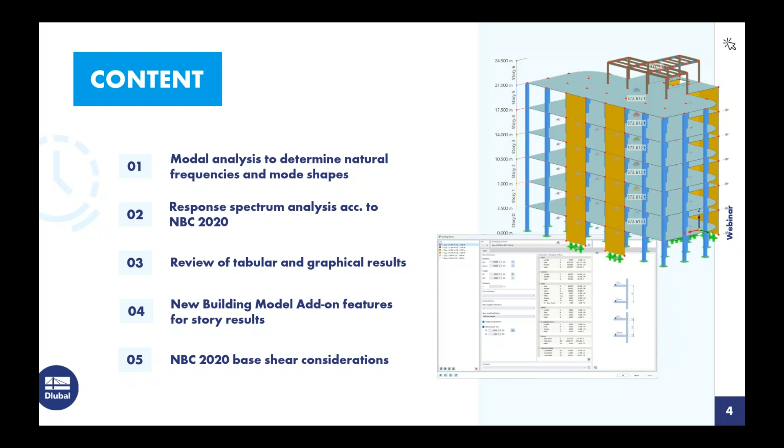So before we begin, I want to discuss the NBC 2020 earthquake methods of analysis that are given in Article 4.1.8.7. So we do have the equivalent static force procedure that is provided in 4.1.8.11, and this is certainly a simplified approach for seismic design. Now, this can be applied for buildings that are of seismic category SC1 or SC2, given in Table 4.1.8.5-B.

It also can be applied to regular structures with a height less than 60 meters and a fundamental lateral period less than 2 seconds. We can also apply this simplified approach for irregular structures, and we would refer to Table 4.1.8.6 to see what categorizes a structure as irregular. But the height must be less than 20 meters, and that fundamental lateral period must be less than 0.5 seconds.

Then we have the dynamic analysis procedure in 4.1.8.12, and this includes the response spectrum method, the time history method, or the nonlinear dynamic analysis. And this should really be applied to all structures that do not satisfy the simplified requirements set forth in Article 4.1.8.7. For today, we'll move forward with the response spectrum method for our structure.

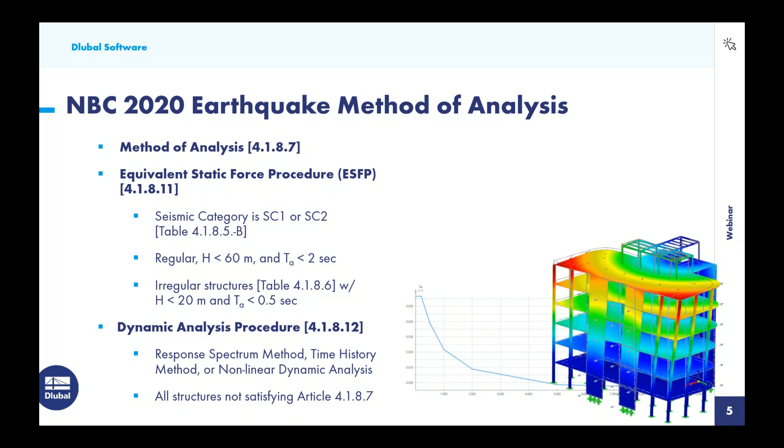So we'll begin in RFEM here, where I have already modeled our multi-level story structure. So we'll quickly go over a bit of the model input as shown over here in the RFEM 6 navigator on the left. So we can see our input materials, and a majority of the structure is defined here as a concrete material with a compressive strength of 40 MPa. But we also have a small steel structure up at the roof level here with a material of A992 steel.

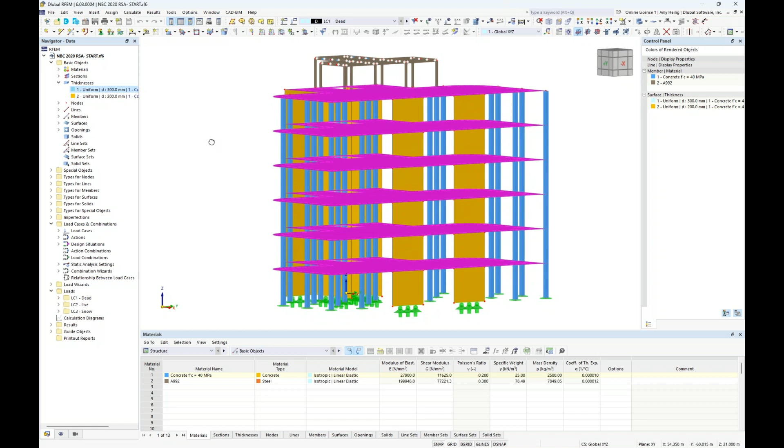As far as our cross sections, you'll notice that our concrete columns that are spanning between floors are just going to be square 350 millimeter by 350 millimeter concrete rectangular sections. And then as far as our steel members, we have several W shapes defined directly from the RFEM 6 CSA library. And finally, we have the thicknesses defined of our surfaces. So this would include our floor slabs here, which are defined with a 300 millimeter thickness. And then we have the thickness of all of our shear walls, which are going to be defined with a slightly smaller thickness of 200 millimeters.

So that's just a basic overview of the structure, but we would also like to take a quick look at the applied loading that, again, I've already added to this particular model. So within our dropdown, we have three simple load cases, all gravity loads. The first is going to be our dead load, and this is going to be a surface area load of 3.5 kilonewtons per meter squared applied at every level.

We also have a live load, with a modified magnitude here of 2 kilonewtons per meter squared, again applied at every floor level. And finally, we have just a general snow load at the top level here of 1.5 kilonewtons per meter squared. So now that we have reviewed the overall structure and the loading, we want to move forward now with our modal analysis.

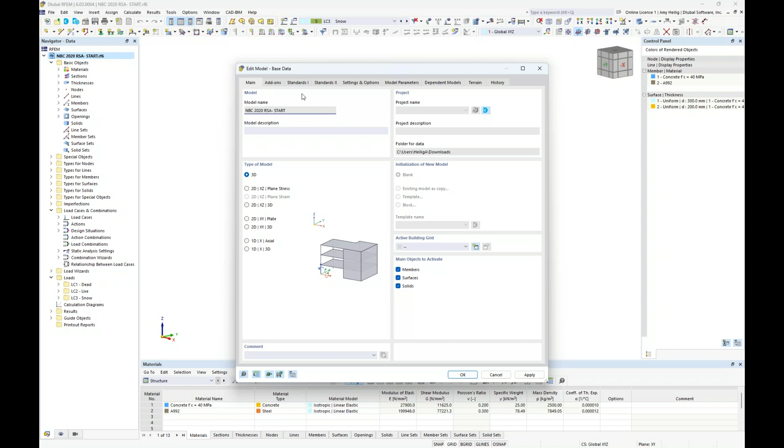So we want to right-click on the model name here in the Project Navigator to visit what's called the Base Data dialog box. And this dialog box would be presented to you when you first create a new model within RFEM. But on the second tab are all of our optional add-ons.

So to quickly explain the configuration of RFEM, the base program itself allows us to fully model the structure, including all of the materials and cross sections from the library. We can apply loads and run a basic static analysis. But the minute we want to move forward with design according to the various standards, we would activate one of these add-ons, for example, concrete design, steel design, timber design, and so on. And in particular, today, we want to activate our dynamic analysis add-ons, and we'll begin with the modal analysis.

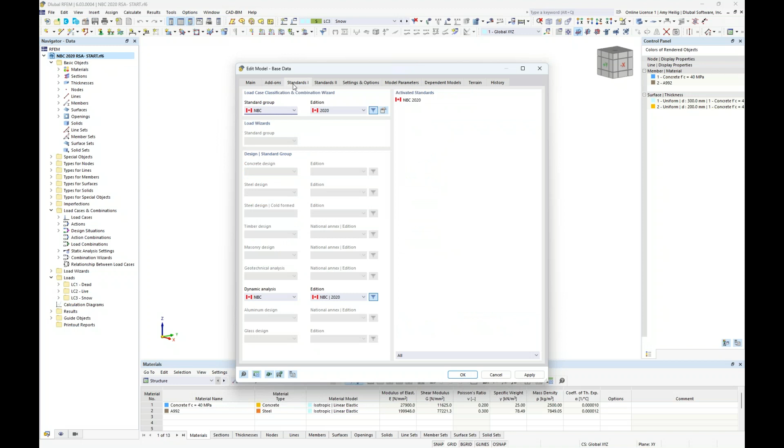So on the third tab, we will generate our load combinations automatically according to the NBC 2020, but we see all of the relevant international standards that are available in the base program as well. And because we have activated now that dynamic analysis add-on, we will go ahead and reference the NBC 2020 here.

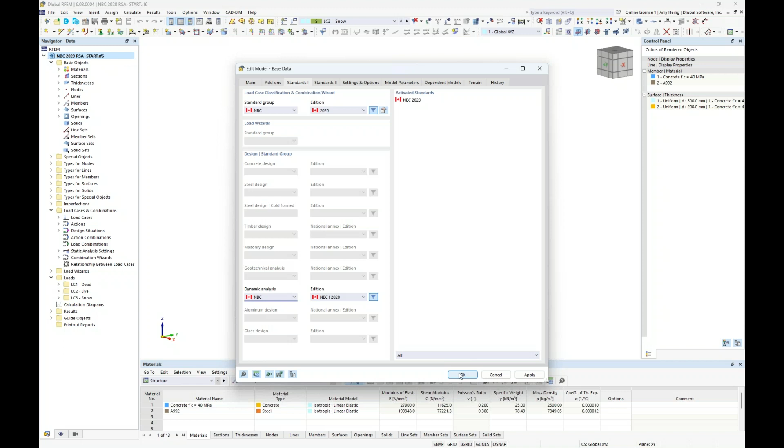So once we have activated that add-on, we will go back into the program and we want to visit our load cases and combinations dialog box. Well, we can immediately pull that up here by editing the active load case. And again, under the load cases tab, we see those 3 simple load cases that we just reviewed, dead, live, and snow, but we're going to create a 4th load case. And the load case name is going to be modal analysis.

Now, because we have activated that add-on, you will notice here that within the dropdown, we now have a new analysis type called modal analysis. And this is only available because we have activated that add-on. So you'll also see a lot of these settings immediately modify in comparison to the static analysis. The first thing to take a look at is the modal analysis settings. So we'll go into the edit dialog box here and we have a couple default options.

The first input is the method for determining the number of modes. So this is by default set to user defined, where we can directly put in the number of mode shapes we would like to solve for. And for today, I'm going to increase this to 10, but you can solve for 10, 20, 50, 100 different modes if you prefer. The alternative method in this dropdown is automatic to reach a maximum natural frequency. So you'll notice that we can input the maximum natural frequency and the program will determine the number of modes needed to reach that particular value.

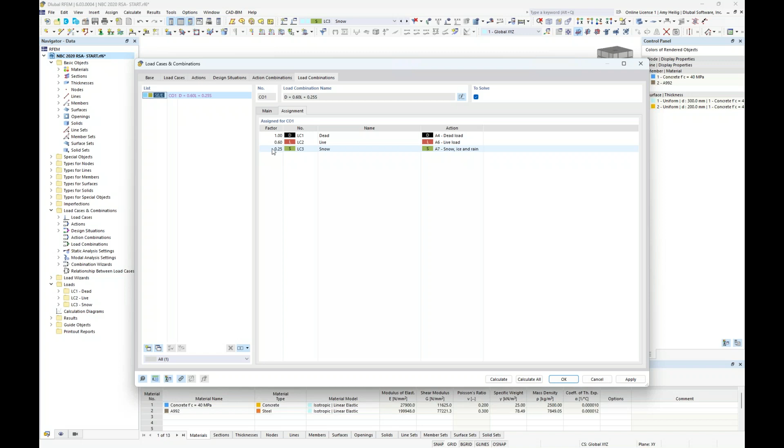And now when we jump to the load combinations, we will see all three load cases considered with the relevant factors directly from the NBC. So 100% of the dead, 60% of the live, and 25% of the snow. So jumping back to our load cases and under the modal analysis, we can now use our drop-down box here to select that mass combination. So now these relevant load cases will be converted to mass.

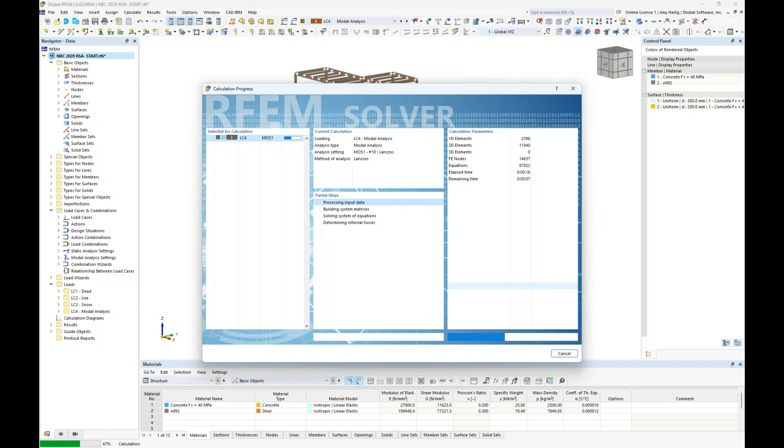Okay, we're now ready to run the calculation, so we can simply hit calculate under this particular load case modal analysis. The program will generate our FE mesh for us, and we are going to calculate a total of 10 different mode shapes. Remember, this is the input that we have input into the particular modal analysis settings. We will also consider the mass conversion of the particular mass combination that we have also set.

So when that calculation is done running, we can take a look at our results. And over on the left, we now have a fourth tab available in the navigator. And within our dropdown, we see here 10 different mode shapes that we can actually cycle through to see the response here of the structure.

So currently we're viewing the mode shape, and notice at the very bottom here, we have the ability to scale the mode shapes. Now the default option is set here so that the magnitude of the mode shape vector is set to a value of 1.0. That's why we see a max value here of 1.0.

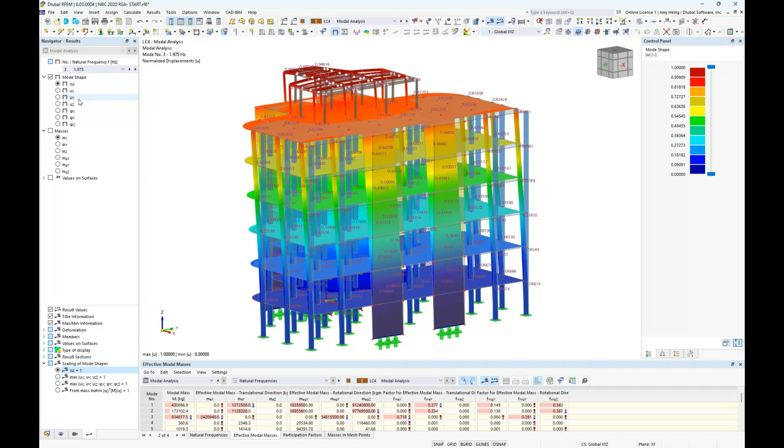But there are some different options we can easily toggle to if we prefer, but most likely we'll be utilizing this first option. So in addition to viewing the mode shape here, you'll also notice the ability to take a look at the masses on the structure used for this modal analysis. And if I zoom in here, we can actually see the mass magnitude at every single FE mesh point that was used in this calculation for our members, our floor slabs, and also our shear walls.

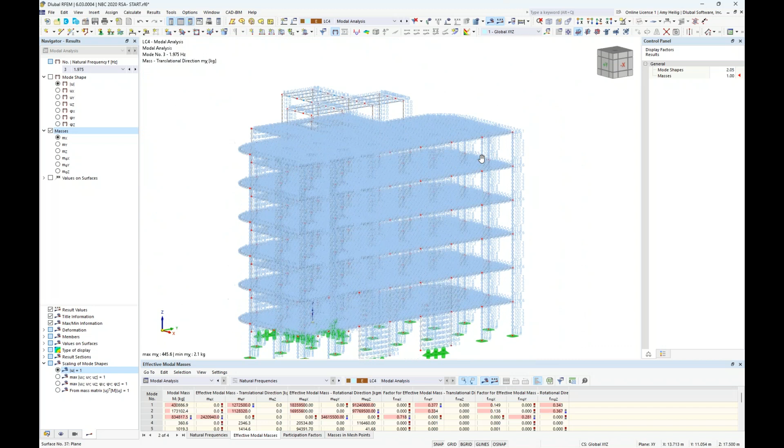So in addition to the graphical output, we certainly want to visit the tabular output here. So once this calculation is complete, we should also see the ability within our dropdown to jump to the modal analysis add-on to view our results here. And the first tab under the natural frequencies includes those 10 different mode shapes as well. So we can kind of cycle through these by clicking in the table, and notice the graphics will automatically update.

But this allows us to view the angular frequency, the natural frequency, and the natural period of our structure for those 10 different modes. Now, it's really important to also take a look at the effective modal masses. And within this is going to show us our mass participation for each mode shape. Well, we can immediately tell what our dominant modes are here, just based on the most mass participation. So mode shape 1 would be our dominant mode in the Y direction. And we can also view mode shape 3 here, which would be our dominant mode in the X direction.

And down at the bottom of this table, we will actually get a summation here of the mass participation. So in the X direction, we have 72%, and in the Y direction, we have 89%. Well, if we refer to the NBC commentary, and currently only the 2015 is released, we don't have access yet to the 2020, but I would imagine it would say the same thing, in that a 90% mass participation is required for this modal analysis. And we're certainly not reaching that with these 10 different mode shapes here.

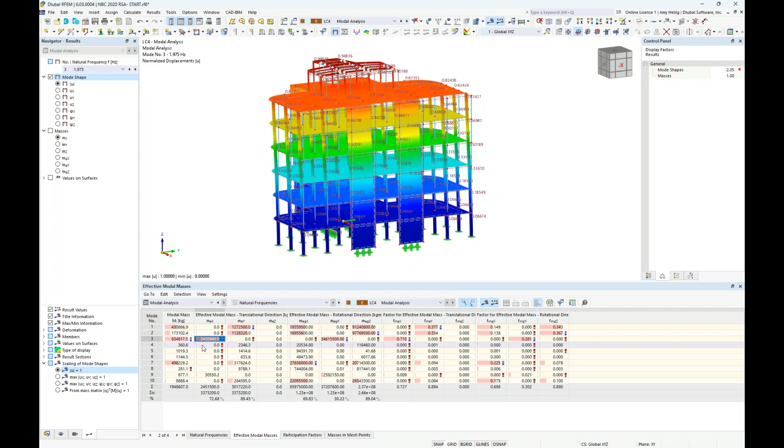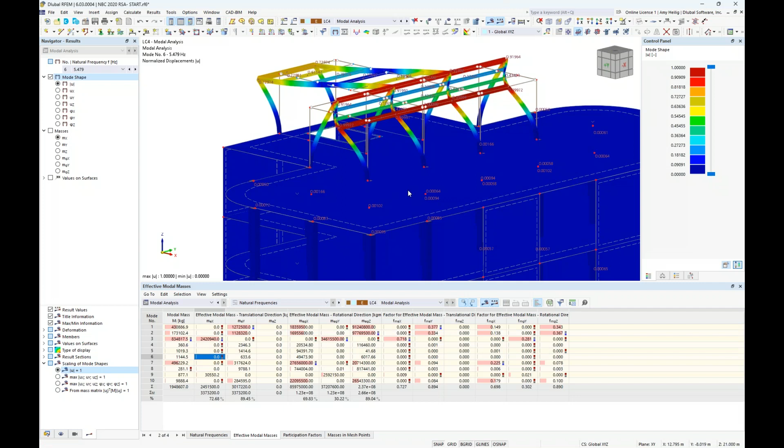Alternatively, if we take a look here at mode shape number 4, for example, you'll notice that really not much is going on with a majority of the structure. Rather, we're seeing a response up here for these smaller steel members only. Same concept with mode shape number 5 and mode shape number 6. So we term these usually as local modes, where again, not much mass participation, but we're seeing very little response for just maybe a few members. So I'd really like to eliminate these local modes in my calculation.

And we're going to go back to the modal analysis here and revisit these settings. Under the Settings tab, remember we have this currently set to no neglection, but what I would like to modify this to is to user defined, where I now have an additional third tab here to neglect masses of a particular object that I select within this dropdown. And for today, I'm going to deactivate the masses for all of my steel members located at that top level.

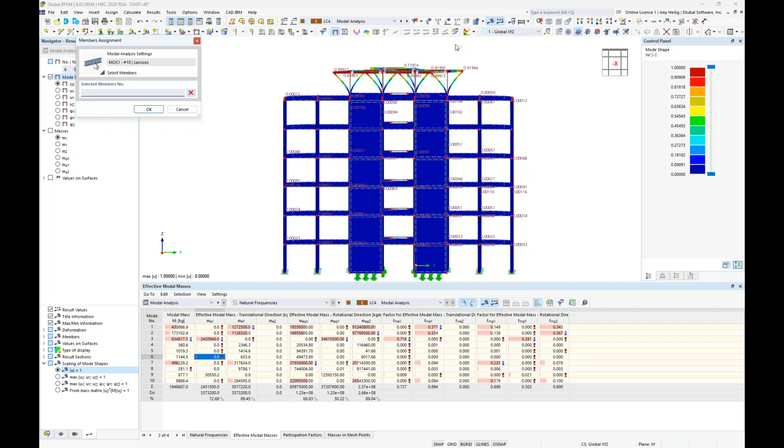And I can graphically select the steel members here. I'll turn off my results. Maybe I turn this into a rendered view by graphically using my selection box here to highlight all of the steel members. Now notice the member numbers are automatically populated. So now we're going to completely neglect the masses for those particular elements.

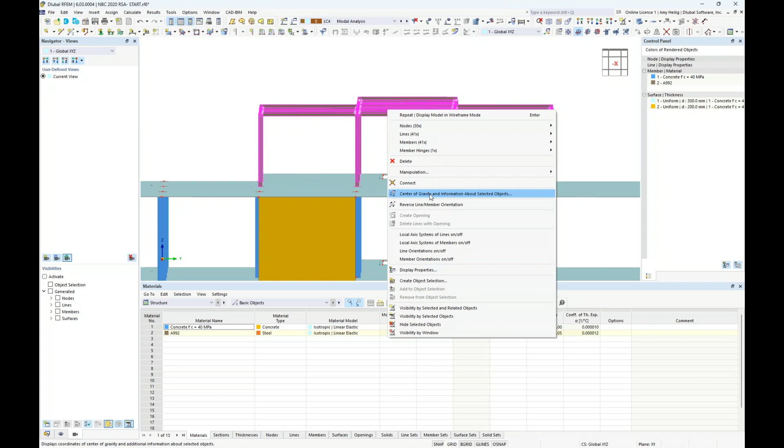But if we would still like to consider the masses and maybe just redistribute to a different area of the structure, we can do so. So if I highlight all of these same members, again, these steel elements up at the top, I can right click to take advantage of this option here called center of gravity and information about selected objects. And what you will notice is that the program will give me the total mass here of the selected objects,

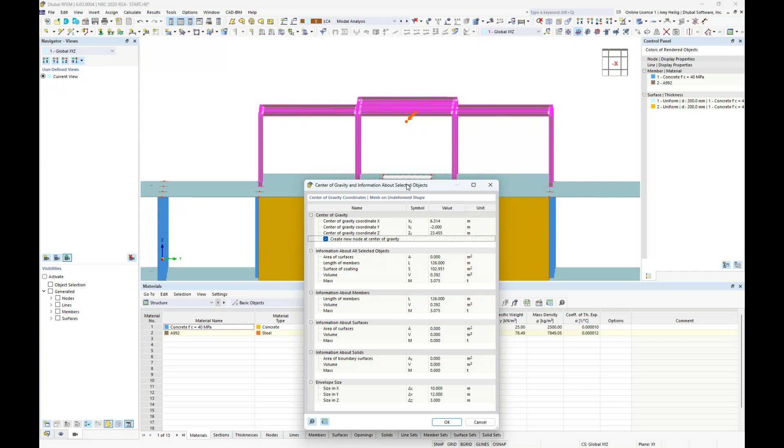3.075 tons. Well, I can take this a step further to generate a new node at the center of gravity with the selected objects, and we see that generated here in the background. So once I've created that additional node, I'm actually going to double click on it because I want to modify the Z elevation here to 21 meters. And by doing so, I just have simply moved this node to the top story here of the concrete structure itself.

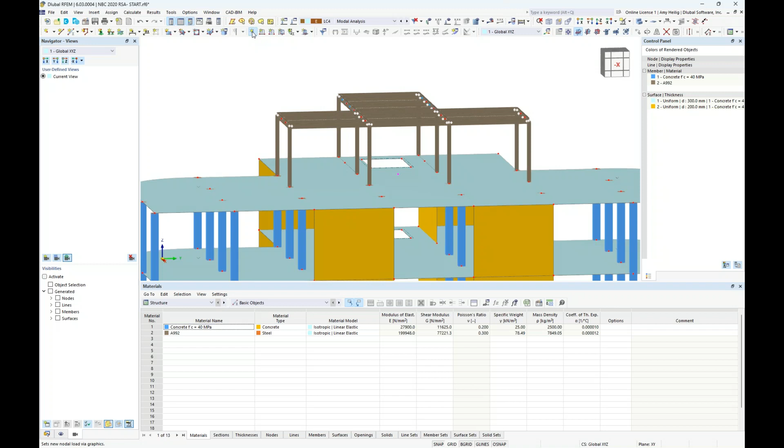Well, now we are going to apply a new nodal load. So I choose my option directly up here in my quick tools up at the top. And instead of the load type set to the standard force, we do have the ability to set a mass load type. And again, taking into consideration the total mass of those selected steel objects, I'm going to simply redistribute it here at 3.075 tons.

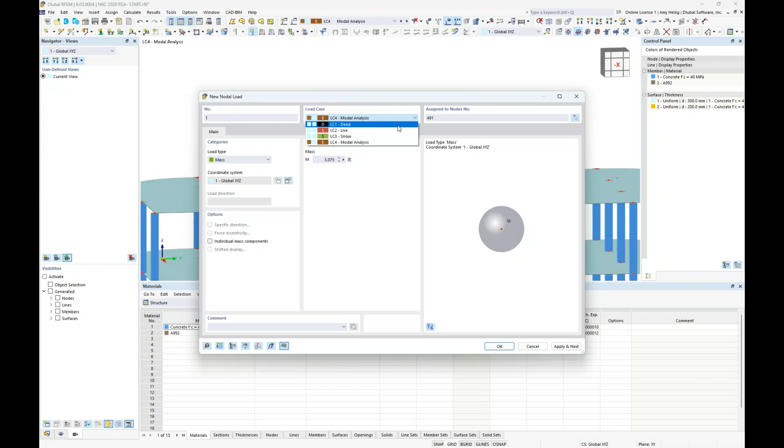And I'm going to apply it to node number 491, or we could graphically select that node. But we do need to make sure that we are under the relevant load case here. So we want to apply that to the dead load case. So when I click OK, the program asks me to delete the results, and we turn this into a rendered view here. And now we see that mass load applied directly to that node, again, at that top slab here

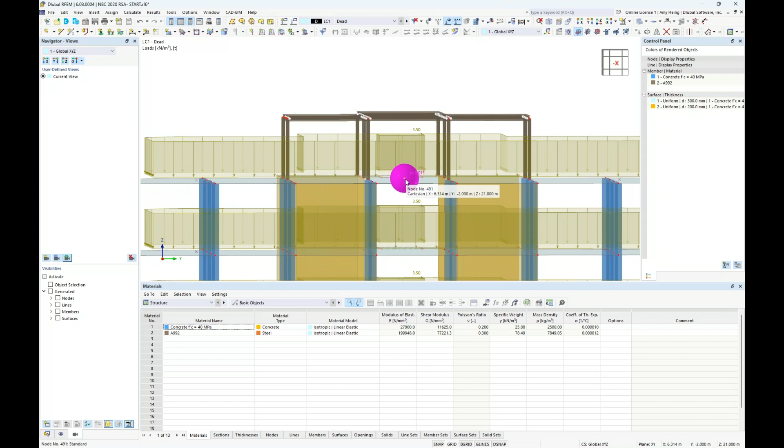of our concrete structure. So we have the ability to apply mass loading as nodal loads, as we just saw, or line loads, member loads, or surface loads to be considered further within the modal analysis directly. So we jump back down here to the modal analysis.

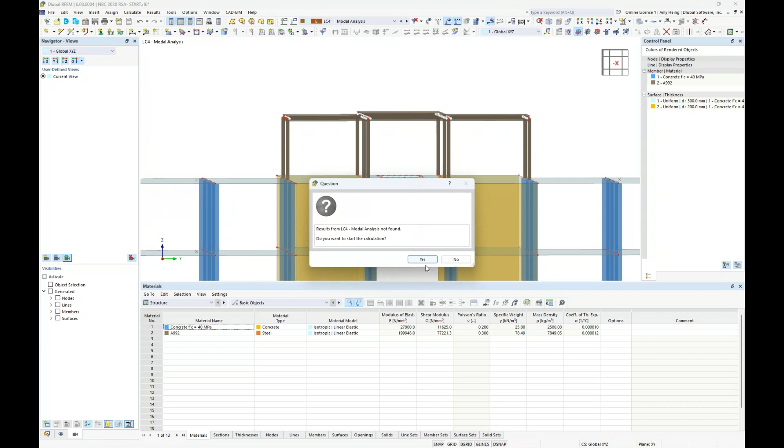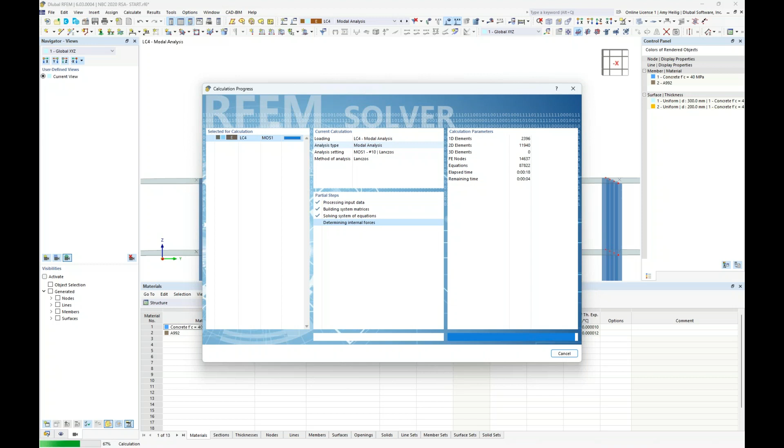We're going to rerun this calculation, and remember now that we are completely neglecting the masses from the steel members, but rather we have now inserted that single point mass load at the top of the concrete structure to simply redistribute the mass. And our hope is by still solving for 10 different eigenvalues that we see slightly better mass participation. So once the results are finished here, we can go ahead and zoom out to see the overall structure. We're currently looking at the modal analysis add-on and the effective modal masses tab.

And we take a look at the bottom here for the summation of the mass participation. And now we have 96% in the X direction and 96% in the Y. So you can see by eliminating those local modes, we don't need to solve for more eigenvalues, but rather what we see here for mode number 4 and mode number 5, that previously had not a whole lot going on for the rest of the structure, actually look quite good now with a response of the overall structure instead.

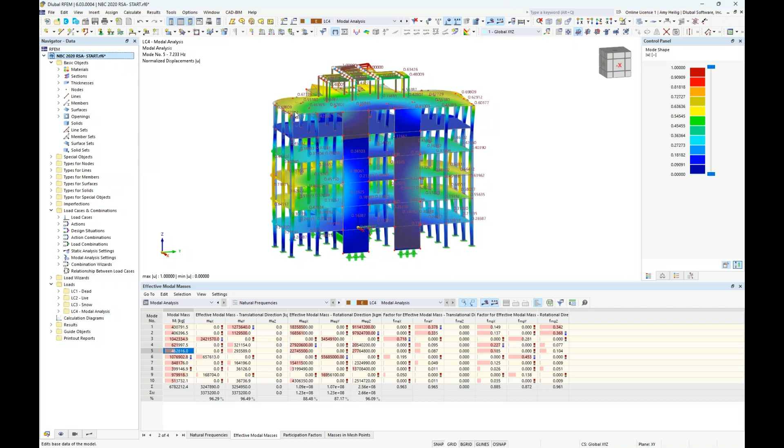Okay, so now that our modal analysis is complete, we have met those 90% mass participation requirements set forth by the NBC. We want to move forward with a response spectrum analysis. So we will go back to the navigator and the first tab here to revisit our base data dialog box. And under the add-ons, you can see that we also have the ability to activate our second add-on, response spectrum analysis. And under the standards, we're making no modifications here.

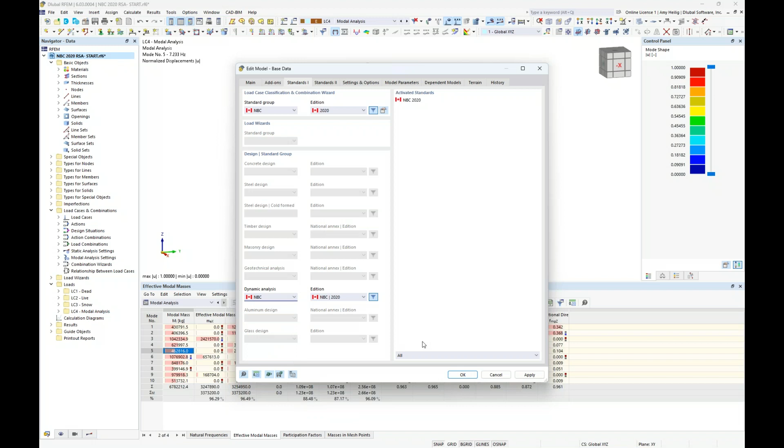We're still running that response spectrum analysis according to the NBC 2020, but I just wanted to point out all of the other international standards that we have available, including the ASCE 7, the Eurocode, and several other international standards. So we'll go ahead and click OK to get back here within the model where we will revisit our load cases and combinations dialog box.

So we will create a fifth load case here, and this one is going to be called RSA for Response Spectrum Analysis Design. Within our drop-down box, we now have a third option available to us, the response spectrum analysis. Now, before I get into some of these settings here on this first tab, I'm going to go over the additional tabs. As far as additional settings, this is actually not something that you need to worry about with a response spectrum analysis. With that dynamic add-on, it's really more relevant for a static analysis. So we'll go ahead and make no changes here.

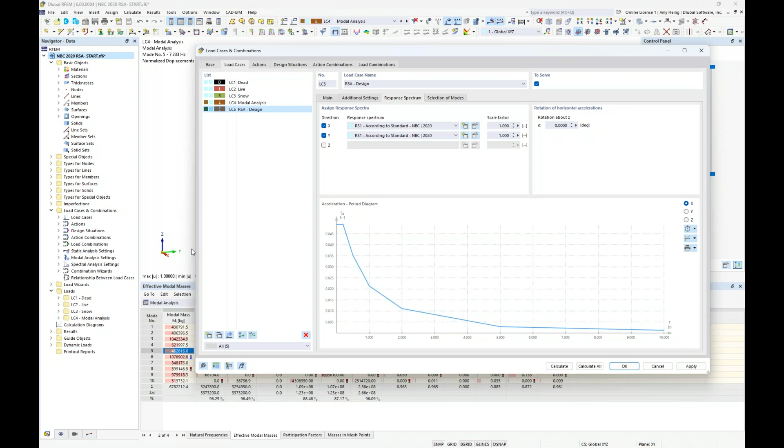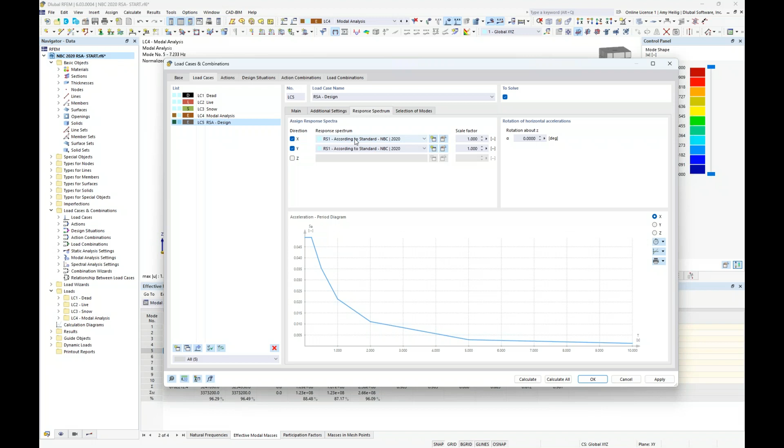Under the response spectrum, we are interested in applying this response spectrum in the orthogonal X and Y directions. And this is just based on these global axes here in the background of the RFEM model directly. Now, of course, if we were also interested in a vertical seismic response spectrum, we would activate the Z direction as well. The program has automatically set a response spectrum definition type here according to the NBC 2020, but we can go ahead and edit the settings within this particular definition type.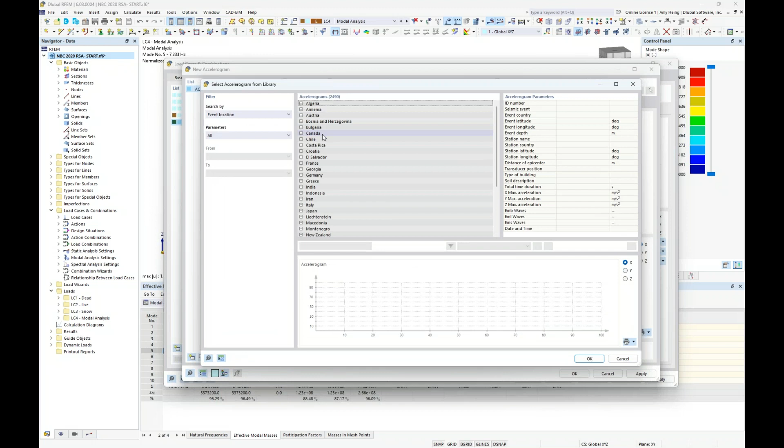So as far as generating this response spectrum, we have several options within the dropdown. The first is user-defined, where notice that you can input directly the period, the frequency, the acceleration, and this diagram will be automatically created based on this input. Alternatively, we have the ability to consider from an accelerogram. So with the accelerogram, we can take a look at the RFEM library directly, where we have several recorded earthquake events from all the various countries, including Canada here. So we could select one of these particular accelerograms to be considered for our response spectrum analysis.

Now, finally, the last option here is according to the NBC 2020, which is what we'll be moving forward with today. Now, it's very important to note here that under the spectrum type, we have two options, the elastic and the design. We'll actually touch on this at the end of the presentation today, but for now, we want to choose the design spectrum. And once we have set the spectrum type, we do need to input several variables here, including the spectral response acceleration for the various periods.

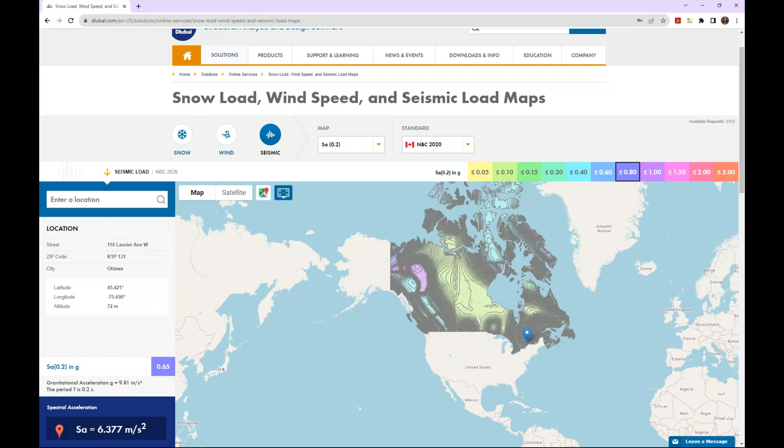So once we have this information, we would of course input it into the table here. We would also set additional factors such as the importance category. So for today, perhaps we set this to normal. We would set the site coefficients such as the site class, and today we'll set this to site class C. Then we also have the ductility related force modification factor, R sub D, and the overstrength related force modification factor, R sub O. Once all of the relevant information is input in here, we see the response spectrum diagram automatically created down here at the bottom.

So we go ahead and click OK, and we want to ensure that that response spectrum is applied in both the X and the Y directions within this dropdown. The final tab here is the selection of modes. So what you'll see listed are the 10 different eigenvalues that we solve for from the modal analysis. And what's nice is that we also get a nice summary here of the mass participation in the X and Y directions. So 96% in both the X and the Y directions, as we have already taken a look at the previous results back in RFEM.

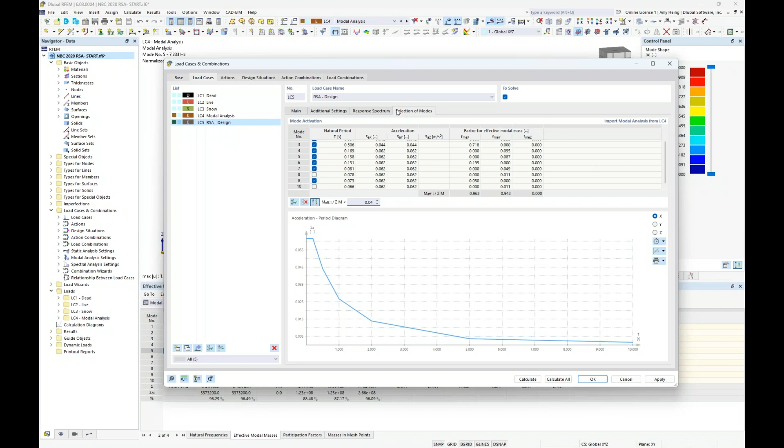So now that we are complete with these additional tabs up at the top, we go back to the main tab to talk about these spectral analysis settings. And again, by default, we do have a definition type set here. This will allow us to set the modal combination method for the periodic responses, and we have 3 different options available. We can take into consideration damping for the CQC rule, and we also will need to set the combination of the directional components, again with 3 different options available here.

So this is a really important topic, therefore I'm going to jump back to the PowerPoint to explain this in more detail. So we'll begin first with the modal combination method, and that's that first drop down available to us. So I'm going to jump ahead here in this PowerPoint and what you would ultimately see in your result output once we do run this response spectra analysis. So remember that we're solving for 10 different mode shapes, or maybe we've deactivated a couple of those.

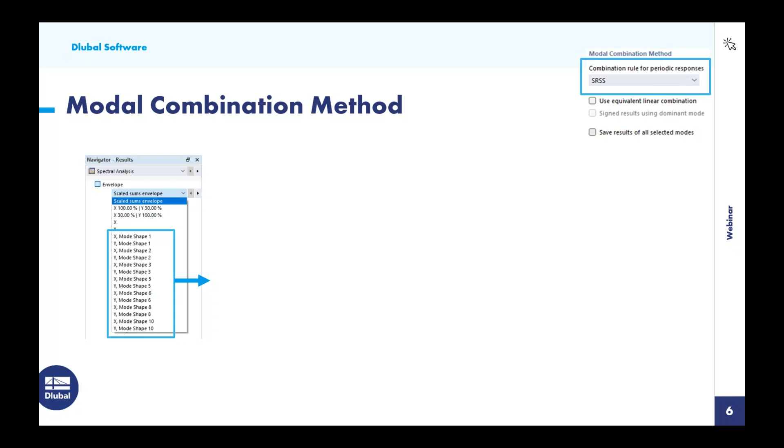So we're going to apply this response spectra analysis in both the X and the Y directions for all mode shapes selected. However, we need to somehow combine these so that we get a single response in the direction X and a single response in the direction Y. And within this dropdown, we choose the method of how these will be combined.

The first is going to be the square root sum of the squares, the SRSS rule. And this is where we're going to combine the max results by squaring them, adding them together, and taking the square root. Of course, you'll notice that when we do this, we will lose the signage. The second option looks very similar here, but you'll notice that we have an additional coefficient epsilon that's included within this equation, and this is the correlation coefficient. The equation for epsilon is shown here, and the big difference between the CQC and the SRSS is we have the ability to consider damping.

And finally, we have the absolute sum. This is just where the modal analysis is conservatively superimposed. So certainly, again, the most conservative approach. So once we have chosen the relevant method, what we will see in our result output is, again, a single response in the X and a single response in the Y.

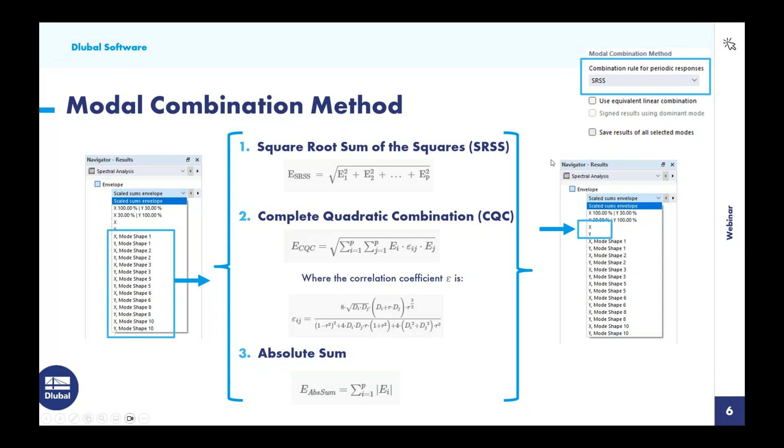So the standard SRSS and CQC combinations, those first 2 methods that we were talking about, inevitably we're going to lose the corresponding internal forces. And what I mean by this is that if we take a look at, for example, a column's max axial force, we'll lose the corresponding moment in the results when we combine these. This is why we have an additional checkbox option right below this called the equivalent linear combination. And this will essentially give us a more realistic result as well as the correct signage.

So taking a look at the square root sum of the squares, SRSS, with this option checked, we see the modified equation shown here. Very similar, we have the CQC with the linear combination checked. Again, we'll see how these formulas vary slightly from the formulas shown on the previous page without the equivalent linear combination activated.

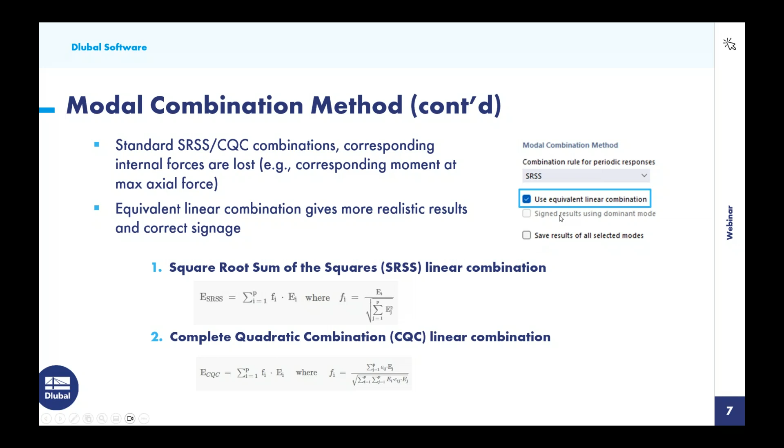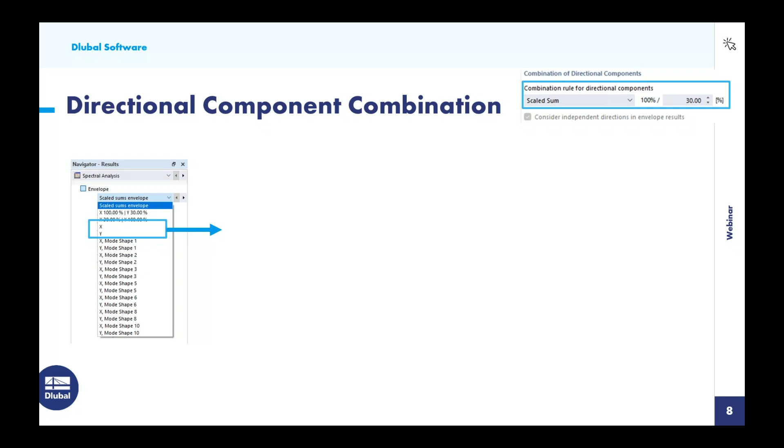And finally, we have our final dropdown within these options for the directional component combination. Well, we now have a single response in the X and a single response in the Y, but we know that earthquake loads don't necessarily always act 100% in the X direction of our structure or 100% in the Y direction, but rather it's usually a combination of both. So the question is, well, how are we going to further combine these for our eventual design of the structure? And again, we have three different options here.

The first is going to be the SRSS rule once again, where we square them, take the sum, and then take the square root. The second option, and probably the more common approach if we are designing to standards such as the NBC, is the scaled sum or the 100/30% rule. This is where we are going to consider these independent directions, but we're going to take 100% of the X and add it to 30% of the Y. Now, if we were also considering a vertical seismic in the Z, we would additionally add 30% in the Z. And we'll create a second result here with 30% in the X plus 100% in the Y.

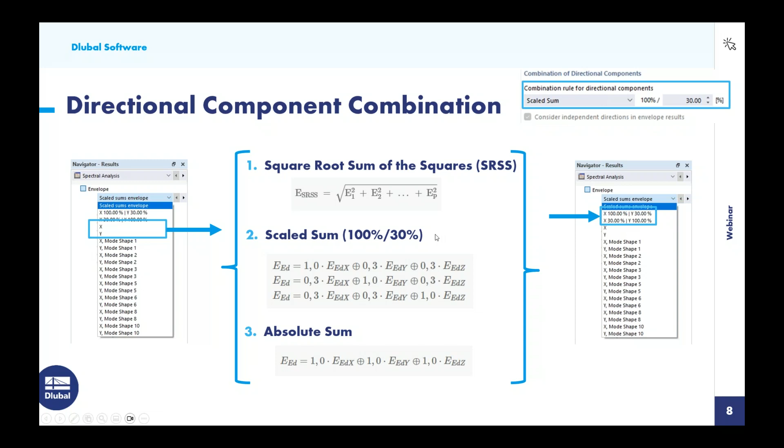Now, the final option for this method is the absolute sum, and this is just simply where we are going to add 100% of the X to 100% of the Y and possibly 100% of the Z. So again, the most conservative approach there. But assuming we move forward with the 100/30% rule, which is exactly what the NBC calls out if we refer to Article 4.1.8.8.(1)(c), we should see two results further output in our results for the response spectrum analysis, exactly as we just discussed here, in both orthogonal directions.

Okay, so let us go back to RFEM yet again to choose the combination rule here. Just notice that when we have the CQC selected, we now have the ability to set that damping ratio here on the right-hand side. But today we'll move forward with the SRSS with the equivalent linear combination. Now, the signed results using the dominant mode, this is currently grayed out. We determined that with the way that the response spectrum analysis is carried out, there could be results that are unconservative if we were to apply this method here.

So instead, in the near future, what we plan to do is to explore the option of exporting out the equivalent loads from the seismic response, and then we could certainly take advantage of options such as this for the signed results. But for now, you'll see that disabled.

The save results of all selected modes. Remember, we're combining all of our mode shapes in the X and Y direction according to the SRSS. This just simply allows us to view the structure's results, including deformations, internal forces for each mode shape as well.

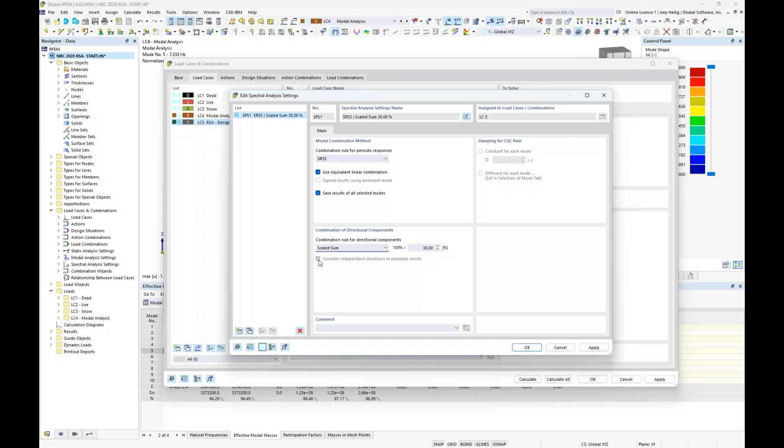The combination of directional components, as mentioned, we will refer to the NBC to set that 100/30% rule. You see a checkbox activated here in the background. This just means that ultimately in our results, we will give you an envelope solution. So the max and min results for the 100/30% rule, but we will also consider 100% in the X and 100% in the Y in those envelope results as well. So this is checked by default.

So once we have set this information under these particular settings, we want to import in the modal analysis from the load case. Well, we've only run one modal analysis for today under load case 4, but we could create multiple load cases for different modal analyses, and why this might be beneficial if we were making some experimentations with different mass combinations, neglecting masses, or whatever it may be, we would have the ability here to select a different modal analysis.

And finally, we have the consider accidental torsion. So for this, we refer to the NBC Article 4.1.8.12.4 that tells us we do need to consider accidental torsion in our response spectrum analysis. And we do so by setting here 10% in both the X and the Y directions. And this is based on the building length in both of these orthogonal directions.

And notice the program automatically calculates what this building length is, but if we would like to override that, we could certainly do so. But essentially, internally with our response spectrum analysis results, an additional moment will be applied at every single FE mesh point to consider those code requirements.

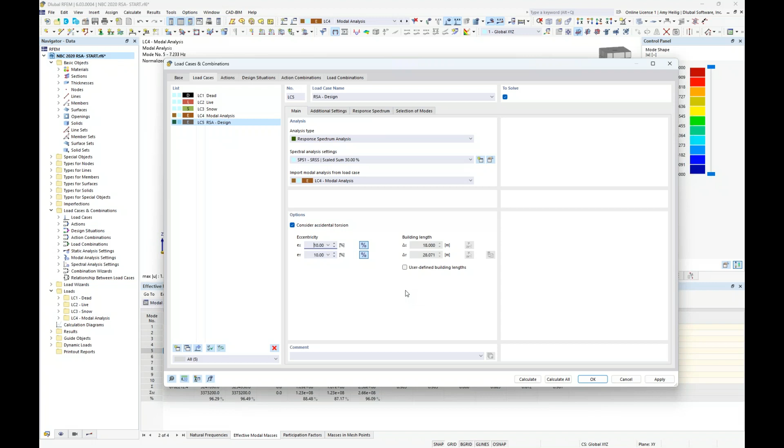So we are now ready to run our calculation. Once again, you'll notice here that we have several input options that it's solving for load case 5 here for that response spectrum analysis. And this is just simply because we are considering all of the 10 different mode shapes, except for the 2, of course, that we deactivated, in both the X and the Y direction, applying that response spectrum analysis to each mode shape, and then combining according to the relevant settings that we just discussed within the PowerPoint.

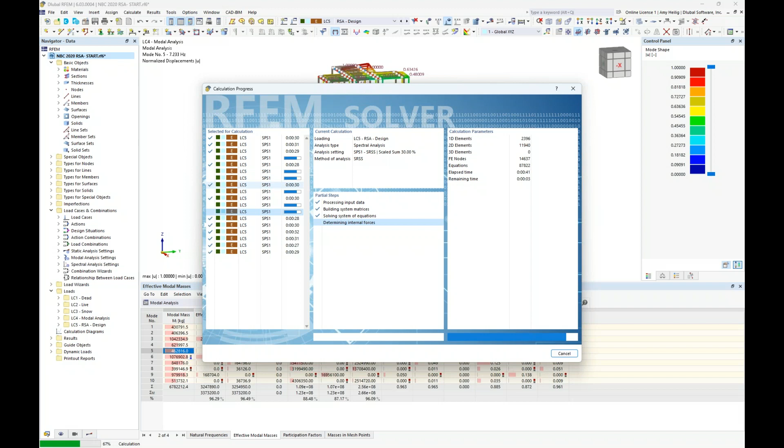What else is new within RFEM 6? You'll notice that these are being solved simultaneously, taking advantage of the multi-core processor within your computer. Previously in RFEM 5, it would require each of these calculations to be run one by one.

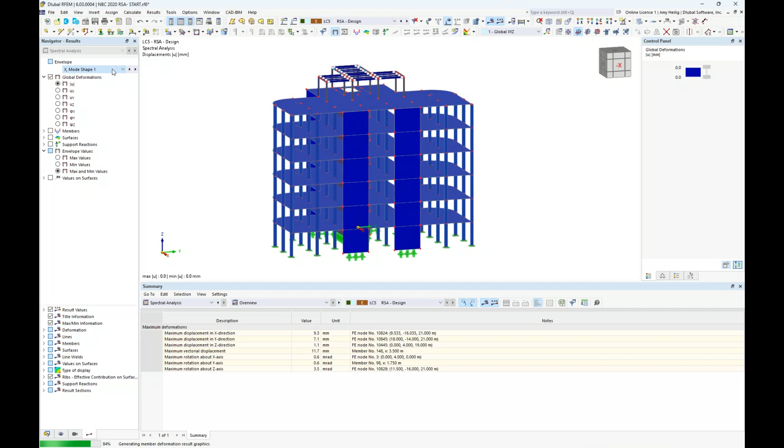So now that the calculation is complete for the response spectrum analysis, we will jump yet again to our navigator here to this 4th tab where we see our results within this dropdown. And just like what we were discussing within the PowerPoint, we have all of the various results here for the individual mode shapes in both the X and the Y directions. But we also have 100% in the X, 100% in the Y. And we have the combined 100/30%.

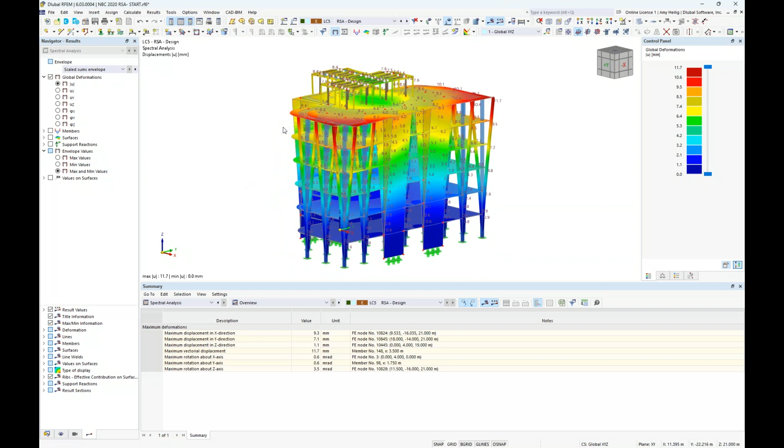And finally, we have the scaled sums envelope, and this is going to be that envelope solution that includes the 100/30% rule, but also 100% in the X and Y. And you can see the envelope values can be activated here. Currently, we're looking at the max and min values. That's why we kind of see duplicate results here for our deformation, but we could set this to the max values only or the min values only, or keep this as both.

But in addition to the global deformations of the structure, we can also view information such as the member internal forces. So perhaps I change this to the max values only, and I'll change this to wireframe view. We can view the maximum axial forces in our columns from our response spectrum analysis, or the shear forces or bending moments.

Same concept here for our surfaces. We can activate the bending moments. We can also activate the color navigator over here. We can take a look at shear forces or those normal forces within the structure for those particular surfaces.

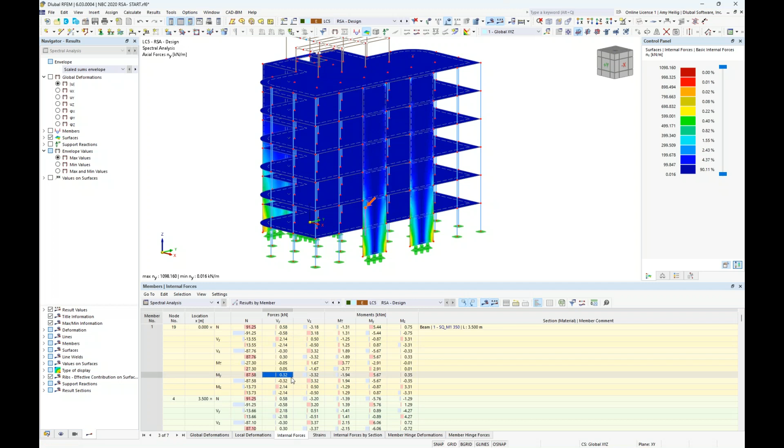Now, all this information shown graphically is also available in table format, similar to our modal analysis, but this time we jump to the spectral analysis add-on, and we can view here the results by member. So information like those internal forces for each individual member, and we can go ahead and turn off our surfaces here. Notice that everything is synced up in the background to show me exactly which member I'm currently looking at. We can export this to Microsoft Excel if we're interested in further sorting capabilities. Same concept here for the results by the surfaces as well.

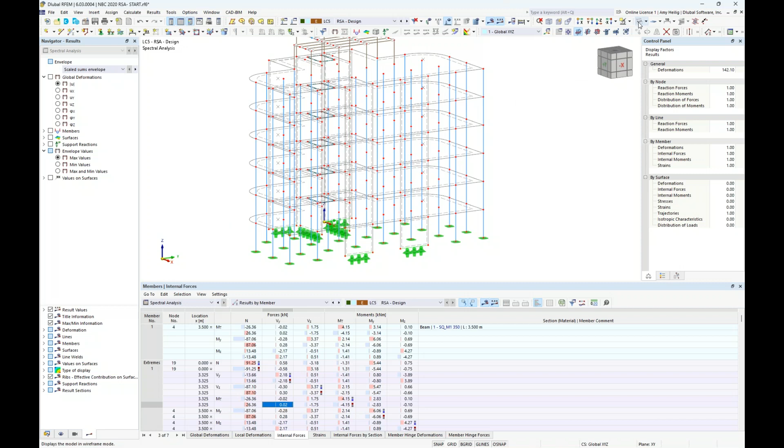So a very important result interpretation from the response spectrum analysis is, of course, the topic of base shear or story shear. And previously in RFEM 5, what we needed to do in order to get this information out of the program was to typically take one of these column stacks here to make a copy of it. Then we would move it over here to the side of the structure, change the member type to something called a result beam. And the result beam would then sum up all the internal forces here for all of the selected objects.

But now in RFEM 6, we actually have introduced a new add-on called the building model add-on to better organize this result output with the response spectrum analysis. So we'll go back here to our base data by right-clicking on the model name. And similar to what we saw here with our dynamic analysis add-ons, we can now activate the building model add-on.

So keep in mind that RFEM is a nonlinear general FEA program. This means that yes, of course, we can model, analyze, and design buildings, but we also can model domes or silos or fabric tensile structures, or maybe it's an FEA of a steel connection. All of these different model types are possible. So what we're hoping to do here with the building model is to integrate more of those building specific features within a general FEA program.

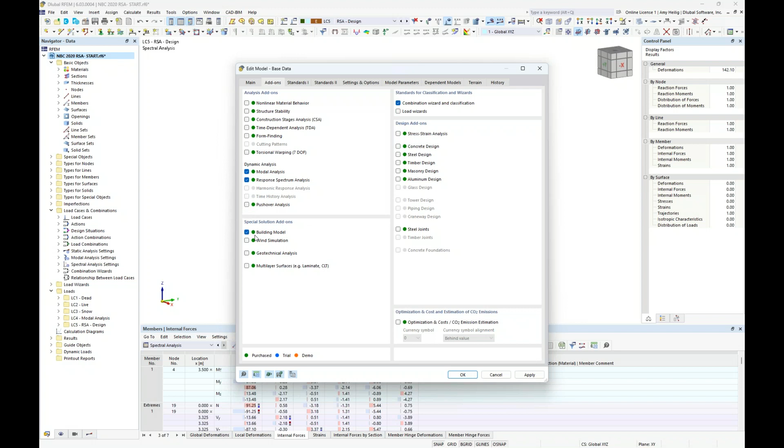And this includes topics like diaphragms, shear walls, spandrels, and I will refer you to the webinar that I presented last month on concrete design according to the CSA A23.3, which is on our website and our YouTube channel, where I actually go into a little bit more detail than what we have time for today with this building model add-on. But for today, we will go ahead and activate this here. And ultimately, what many other software companies are doing with two separate programs, with FEA as well as building specific, we're trying to integrate into a single program with RFEM.

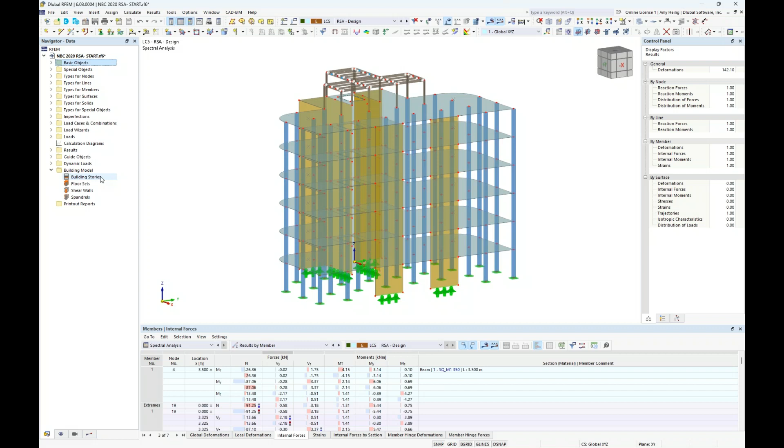Now, at first glance, it appears that not much has changed when we have activated that building model add-on, but I'm actually going to right-click here in one of my folders within my navigator to collapse all of them, just so it's a little bit easier for you to see that we now have a new folder option here called building model. And what we need to define are the various building stories for our structure today. And we do so by right-clicking to create a new building story.

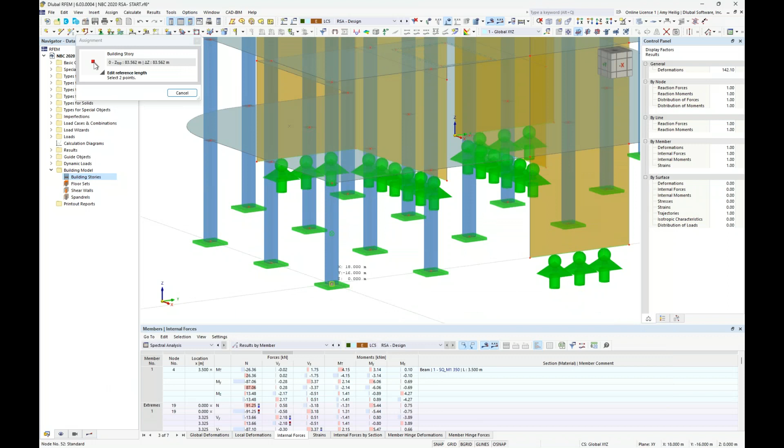The first story is by default automatically created here, but we do need to tell the program what's the base of this story and what's the top of the story. And we can do so by graphically selecting 2 points. So I'll scroll down to the base of the structure to select this point at the bottom. And then my second click is going to be at this first story height. And actually, let me click that again. Looks like I had toggled to a different point. So we see a total height here of 3.5 meters.

Now, I want to also point out that over on the right-hand side, we have a nice table format that includes all of the information such as area, the length, the volume, the mass for all of the objects at this particular story level only. We also have the ability here to define a rigid diaphragm or a flexible diaphragm. Semi-rigid diaphragms are also currently in development and will be released at some point in the future. Now for today, we won't define any diaphragm. We're just going to keep this as the standard surfaces that we already have modeled in RFEM.

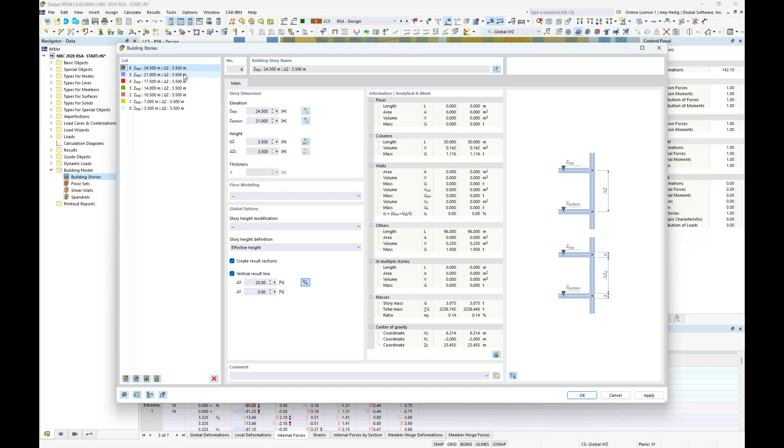We want to continue adding the additional stories by doing so with our button in the lower left-hand corner here, all the way up to story number 6. So the program automatically assumes we have the same story height of 3.5 meters at each level. If you did need to modify that, you could certainly do so. But again, all of the relevant information for this particular story will be displayed on the right. And now when we click OK, if we zoom out here and we kind of rotate the model around, notice that we have a graphical output of each story level shown, clear up to including the steel structure up at the top.

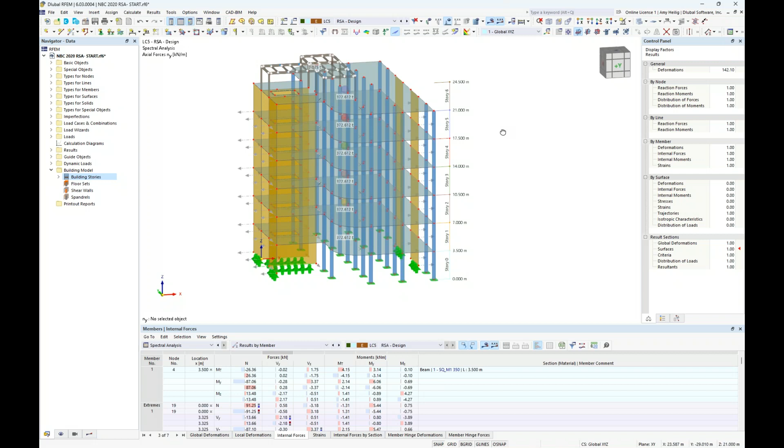So with the results from our response spectrum analysis, the only thing that we need to do here is to revisit our spectral analysis option within our first dropdown, but we now have a new result option called results by story. So I don't need to rerun the calculation. The program just automatically sums up the results that I already have.

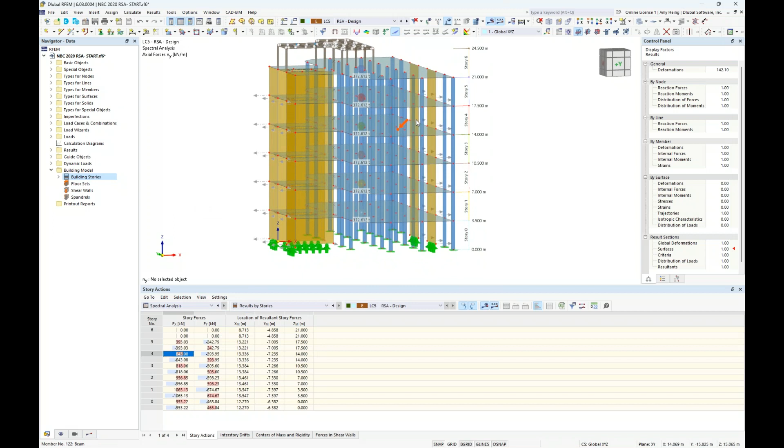And now we see under this first tab, probably the most important information related to that response spectra analysis is our story shear presented at each level. So we're seeing the max and min shear force in both the X and the Y direction, again, output at each story. You'll also see the location of the resultant story force shown here with that red arrow. And we would probably take a look at the base of our structure to determine what that base shear is, again, from that NBC response spectrum analysis.

The second tab is the inter-story drifts, so we can view the drifts as well at each story level. Again, previously in RFEM 5, this information was a little bit more difficult to get out, but now in RFEM 6, with this building model output, we can directly see this at each story level.

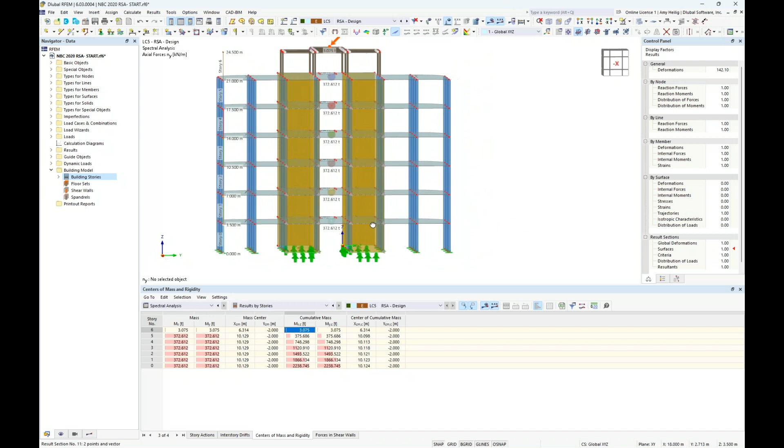The centers of mass and centers of rigidity are displayed here within table output under this third tab, so we can see centers of mass are actually also displayed here with these particular round circles shown here, or this mass ball at each particular level. Centers of rigidity would be available if we had rigid diaphragms defined, which we don't for this example.

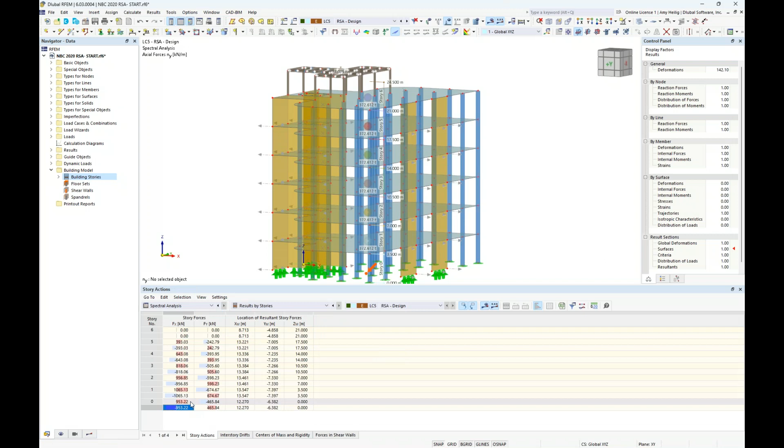And the final tab is the forces in shear walls. So we can actually sum up all of the internal forces for these vertical shear walls at each story level as well. So going back to the base shear, I want to switch back over to the PowerPoint to explain the requirements from the NBC 2020 when we are talking about base shear.

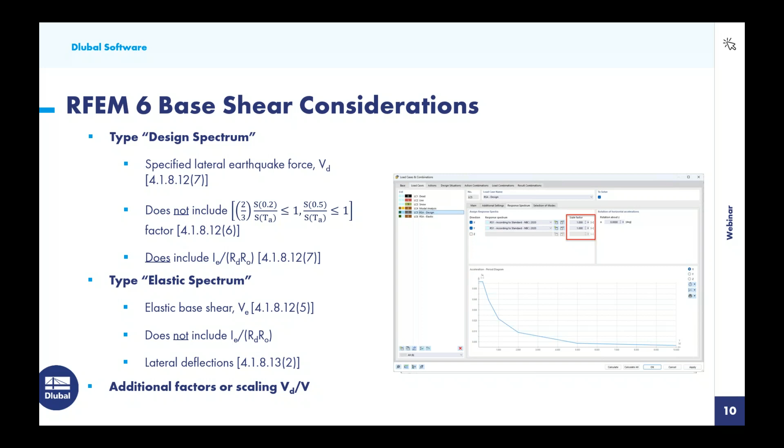So let us go back to RFEM here, and I'll quickly show you how we can consider that elastic design spectrum. So going to our load cases and combinations, I'm going to make a complete copy of load case 5 here. And instead of my response spectrum analysis for design, I'm going to rename this to elastic. Now, all of the previous settings are also copied over, so I don't need to make any modifications to this.

But under the response spectrum type, I'm going to edit the definition type here to also create an exact copy of my existing response spectrum definition. And up at the top, I'm going to modify this to elastic. Now notice that a lot of the input criteria is now gone, and that's again because we're not considering those additional factors here with our response spectrum analysis with the type elastic.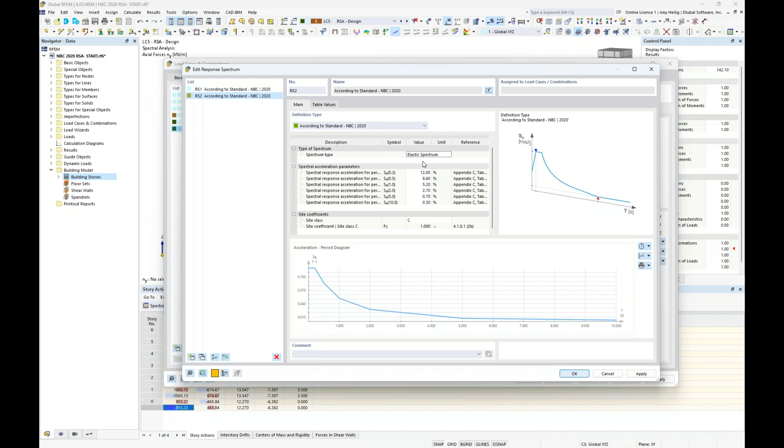So now that we have this second definition type here for elastic, I can simply select it in my drop-down box. And we would rerun the calculation. We would take a look at the building model results, and in particular, the drift, to make sure that our drift is limited to what Article 4.1.8.13 has set forth. No need to run that calculation now. It's really the exact same workflow. I just wanted to show you how we can essentially consider that elastic response spectrum analysis.

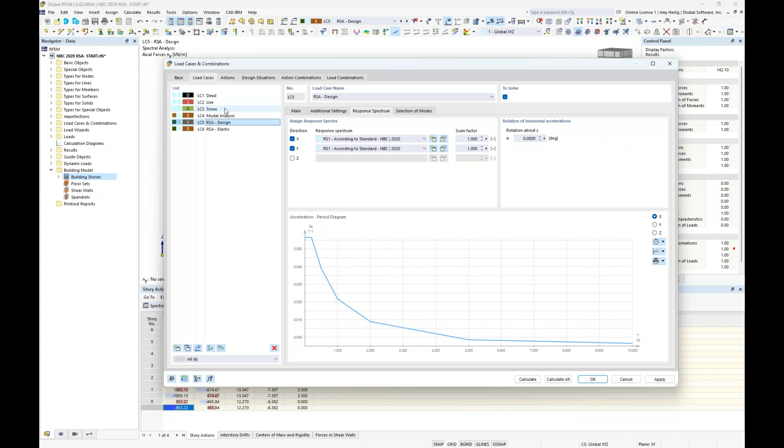Now, the final topic to cover is we now have our earthquake loads from this design response spectrum. How do we combine this with the other load cases such as dead, live, snow, or perhaps we have additional lateral loads like wind analysis? So if I go back to my base data, we probably would carry out the design here utilizing the concrete design add-on or the steel design add-on. Notice we have timber for CLT structures, aluminum, we have cold-formed steel, whatever it may be.

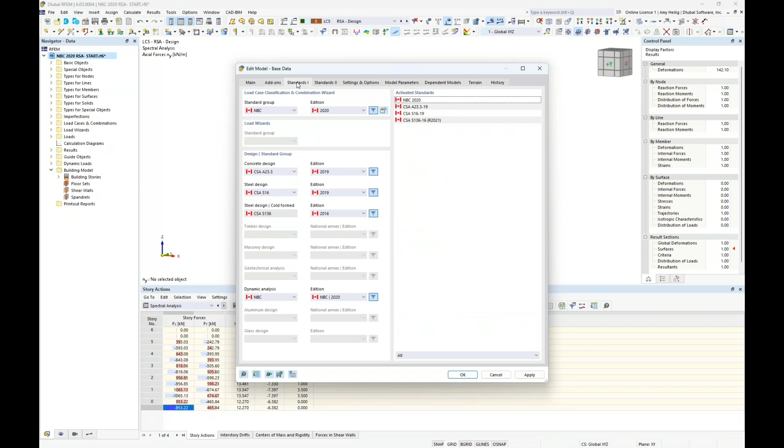And under the third tab now, we get some additional options to carry out this design specific to the CSA standards for both concrete and steel. Now, again, I have previous webinars that are dedicated to these particular topics. So you can refer to those on our webinar and YouTube channel within our website. But for today, I just want to briefly show that we would probably, again, carry out the design of our structure utilizing these design add-ons.

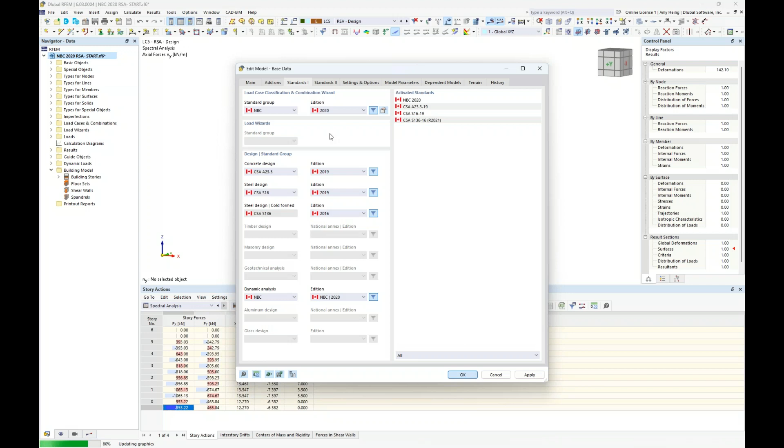Well, if we go back to the load cases and combinations, and we take a look at the design situations. Again, I had mentioned that the program will automatically create these two design situations, and we'll go ahead and activate them again for the ultimate limit state and serviceability limit state that we'll eventually use within the concrete and steel design add-ons. That's why they're both checked here. If we take a look at the load combinations that are generated from these two design situations, you'll see here that I don't see earthquake listed at all.

And the reason why is because these load combinations are being generated according to a nonlinear second order analysis to consider those P-delta effects. But we know that we cannot simply add the earthquake loads to these additional load cases using superposition, because we can't combine second order effects and just add them together like P-delta.

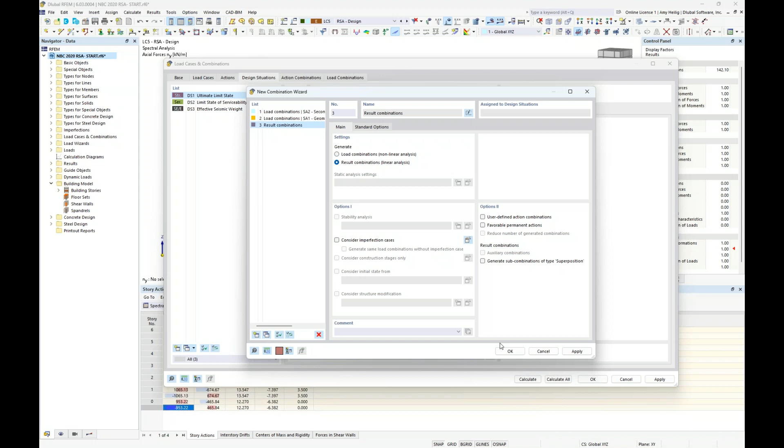So instead, we want to come in here for the ultimate limit state and go ahead and edit these settings here. Again, the default is set to second order analysis, but we're going to create a new definition type. And instead, we want to combine these earthquake results in a linear analysis using result combinations. So once we have selected this new definition type, we want to additionally select it here within our drop-down box for that ultimate limit state.

And now we get a new tab called result combinations. And sure enough, we see here dead, live, and snow, but we also see that earthquake load listed here from our response spectra analysis and the design. Notice also the sub-results. Currently, the scaled sums envelope will again reference the envelope solution from the 130% rule, 100% in the X, 30% in the Y. But if we wanted to consider one of these other scenarios, we could do so within the dropdown. But the default scaled sums envelope will take the max and min results here for this result combination.

We also see a second result combination with our elastic response spectrum analysis. And for this, we actually refer back to the NBC commentary 2015, and in particular, Appendix J, Note 111. And the commentary tells us that earthquake loads are considered rare. So there are no general requirements for SLS design when considering earthquake. Rather, we take a look at the specific elastic response spectrum analysis to make sure that our drifts, in particular under only earthquake loads, are limited according to what the code has set. Therefore, I really don't need to include this in my load combinations as well.

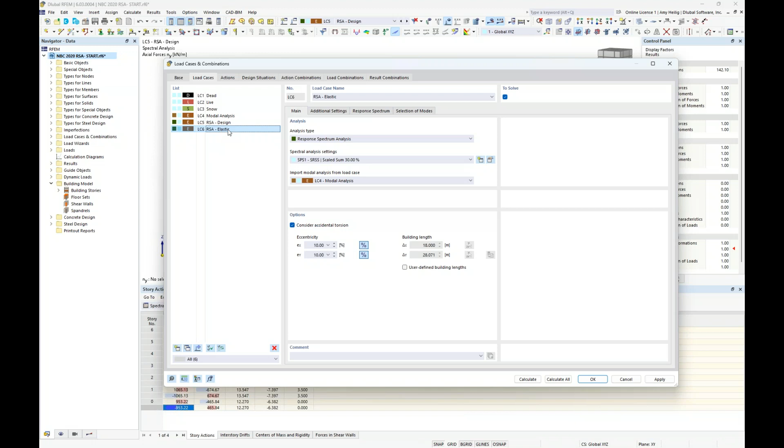So I certainly could go back to the result combination and just uncheck the solve, but probably the better option under actions is you'll see here a separate action category assigned to my response spectrum for the elastic type. I can uncheck the active here. And now under my result combinations, we only have a single result combination considering that design response spectrum analysis.

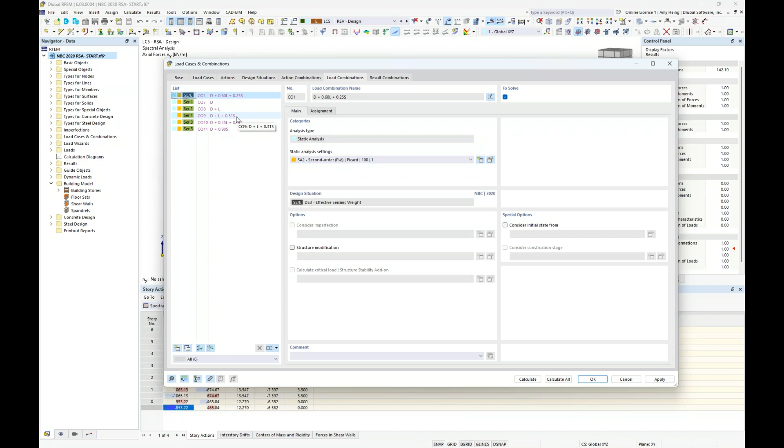When it comes to SLS design, we see here our design situation for SLS design. This is set according to second order. That's probably fine because we are able to combine now for our load combinations for SLS for dead, live, and snow. But again, for the ultimate limit state or ULS design, we can't do so with a response spectrum analysis. We must combine them linearly.

Okay, so that will conclude our presentation today.